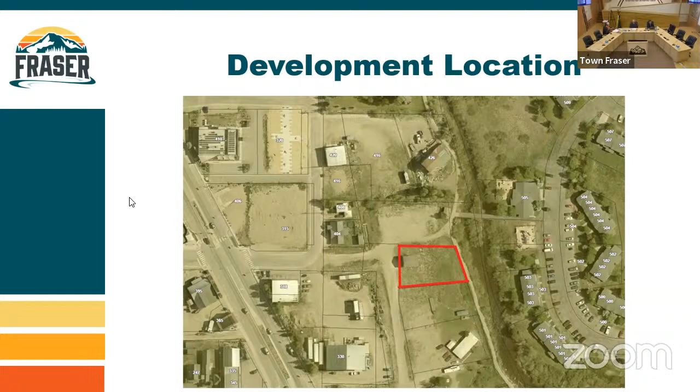Talking about the review timeline for this final plat application: on March 27th, the Planning Commission recommended approval of the preliminary plat and site plan. Then in April, the applicant submitted the final plat application and the referral review period occurred. And then that leads us to today's meeting, the public hearing for the final plat application.

And certainly there was a lot of conversation and activity before this. If you all remember, this parcel was involved in the ballot measure, the land swap. And when that vote failed in November, the town and the applicant have been in conversation about their development plans since that time. Their preliminary plat application was submitted back in January, approved in March. So again, this is just a snapshot of the final plat timeline.

Public notice was provided for today's public hearing. It was published in the Sky High News, Middle Park Times on April 24th. That's the legal notice as it appeared in the newspaper. The applicant also mailed out notices to nearby property owners two weeks ago as required by code, and those affidavits are provided in the meeting packet as attachments 13, 14, and 15 for reference.

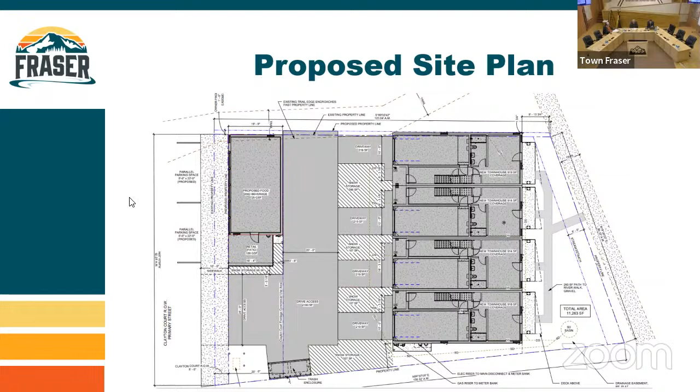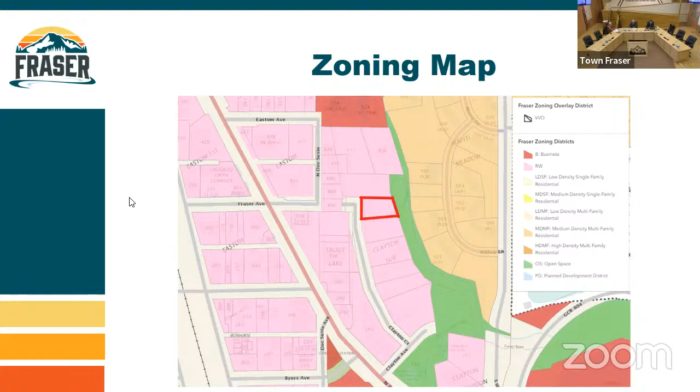These are some of the things that were emphasized and discussed through the preliminary plat application and public hearing back in March for that application.

So the intent of the Riverwalk district -- the intent of a zone district is essentially a vision or purpose statement, saying development in this zone district should do what exactly. The intent statement for the Riverwalk district can be summarized in these bullet points: development that creates a high density, walkable, mixed use neighborhood, integrates the historic downtown with the river, generates downtown redevelopment, economic revitalization, and so on.

Town staff really believes that the proposed development largely meets the intent of the Riverwalk district, namely with providing high density residential development and commercial uses on Clayton Court. Development integrates with the existing Fraser River Trail, and the future cafe space at the existing trail connection to Clayton Court will help activate the northern end of the entire Clayton Court corridor.

Let me ask a question about this plot, if I could. I'm trying to remember, we had quite a debate about the position of the commercial in this district, whether it faces the street or the river. I thought we kind of settled on that -- or does this language about positioning closely to the street come from the zoning definition, or is it an interpretation?

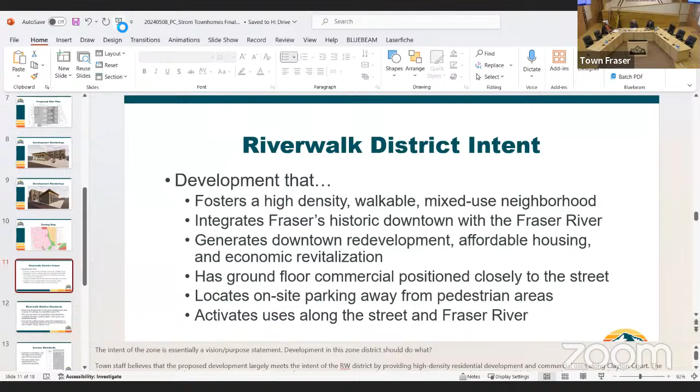And then later, in the building design section for mixed use, commercial and mixed use development, there's a statement: ground floor commercial uses shall be adjacent to street frontages as much as possible. And then there's actually an 'or' statement here -- it speaks to activating uses along the street or Fraser River, and promoting the walkable nature of the district. So I think the language around siting commercial uses is required along Clayton Court, but as far as locating them on the river, it's less strong language, if that makes sense. Although it's called the Riverwalk District, but anyway, indeed.

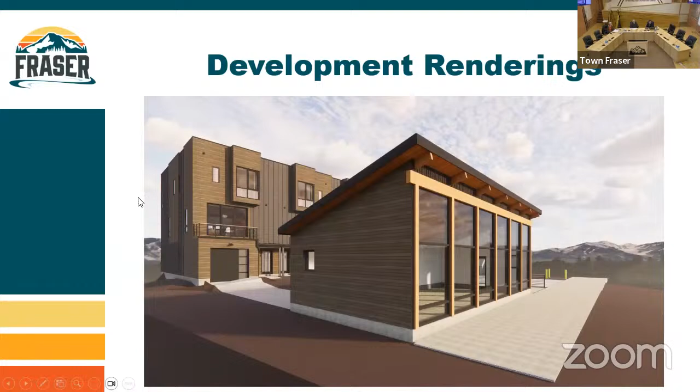Let's get back to where we were. Thank you. Any other questions from the other commissioners on this intent statement?

Moving right along to some of the zone standards, regarding the site's use: it's a mixed use development proposal, a mix of uses in the same development area or group of buildings. That's permitted in Riverwalk, where the intent is to have mixed use development in this area. The development proposal meets all applicable zoning standards -- setbacks, building height, open space, residential density, et cetera -- detailed in the staff report. Staff also believes that the commercial building provided largely meets the requirement to provide commercial uses for the first 20 feet in depth along Clayton Court, again as required by the code.

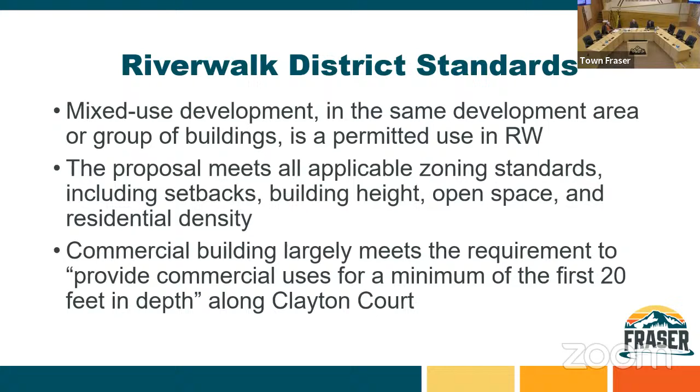Diving into some specific aspects of the property with regards to zoning standards, the site's access is proposed via a 26-foot wide paved driveway. This meets both town requirements and East Grand Fire Protection District requirements.

Parking standards: the development is providing 2 spaces per townhome unit, 1 garage space and 1 driveway parking space, which meets code requirements. Additionally, the town is working through infrastructure design and construction for improvements on Clayton Court.

This includes extending a water main through Clayton Court, paving the road, adding sidewalks, and parallel parking on both sides. It's anticipated that 2 parking spaces will be provided along the development's frontage, and town staff is allowing those spaces to count towards the required parking for the commercial structure. Moving forward, as other properties on Clayton Court develop or redevelop, the town will allow any parallel parking spaces in front of those properties to count towards required parking minimums, as allowed per code.

Landscaping and trash enclosure: the applicant did provide a conceptual landscaping plan; however, the town is requesting, at a minimum, quantities and types of proposed plantings. Because this is a mixed use development in the Riverwalk zone, landscaping is not required per code, but it's strongly encouraged, and since the applicant is proposing landscaping, the town is simply requesting some additional information.

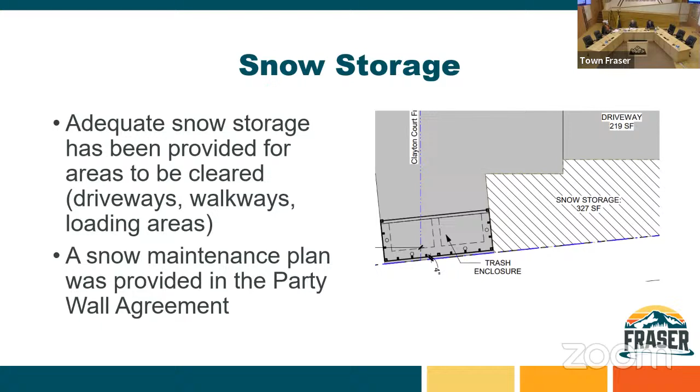Exterior lighting was not provided in the preliminary plat application and was a condition of approval, but with the final plat application the applicant has provided an exterior lighting and photometric plan. It appears to comply with town code requirements regarding lighting intensity and illuminance measures. The only request from the town is that a note be added explicitly stating that all light fixtures and bulbs be dark sky compliant.

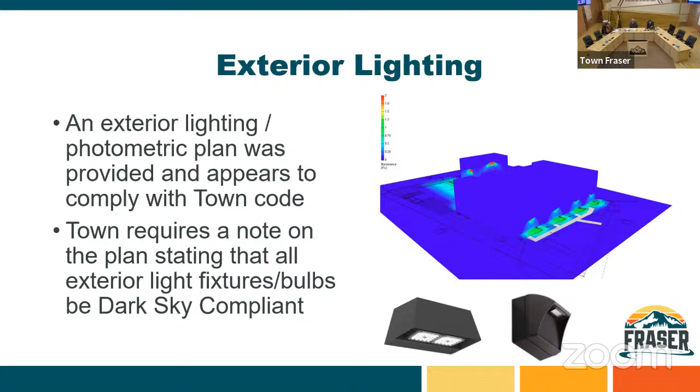On that lighting plan, the applicant has provided images of the proposed fixtures, which appear to be fully hooded, which would be dark sky compliant. We're just requesting that note be added. This lighting plan is attachment 5 in the packet.

Ultimately, town staff recommends approval with conditions. Those conditions are outlined in the resolution as well as in the staff report. Essentially, the town will require that all pending referral comments be addressed from both town staff and external referral agencies.

The applicant did address a majority of the comments from the preliminary plat and site plan submittal, but there are still some pending comments to be addressed. Those comments are summarized as attachment 16 in the packet.

Another condition of approval is for the applicant to execute a development improvements agreement for the private drainage and private landscaping. Frankly, this was something that was kind of missed by town staff at the preliminary plat submittal. In review of their development application, all of their utility infrastructure is private, and our DIA doesn't cover private infrastructure except for drainage, stormwater infrastructure, as well as private landscaping. And that makes sense, especially given the context of this site adjacent to the Fraser River. Essentially, this DIA would just ensure that drainage infrastructure is built according to the plans, but ultimately that infrastructure is privately owned and maintained.

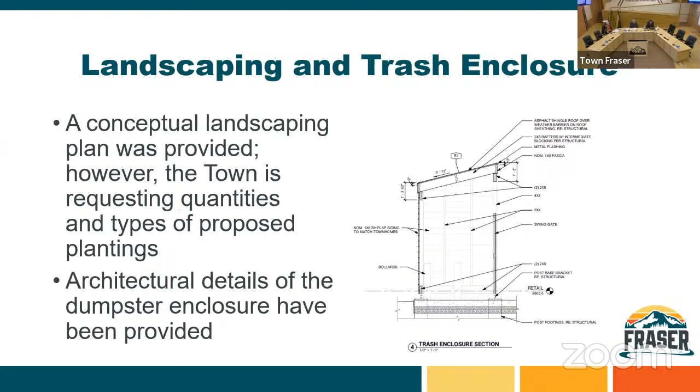Any other questions or comments? One thing, I noticed the fire department, I thought they'd asked for 26 feet on the drive in front of the buildings. I actually reached out to Ryan with East Grand Fire District to confirm this. Let me go back to that slide. So there's a 26-foot wide driveway entering into the site, and then when it goes to the north to access the townhomes, it narrows down to 20. There's a requirement that an access road for aerial fire apparatus, for buildings over 30 feet, has to be 26 feet wide. I think if this was one continuous structure, Clayton Court would be that access road. But in this case, because you have a building in front and then the townhomes in the rear, that 20-foot wide driveway in between the two is the access drive.

What Ryan from East Grand Fire told me is essentially, so long as they can show that a fire truck can navigate those turns, they would allow the narrower driveway width. So that's a comment from East Grand Fire, and a condition of approval as it's a referral comment that needs to be addressed. But East Grand Fire is fine with that narrower 20-foot driveway. I imagine that ladder truck would just pull straight in and sit there, it probably wouldn't even navigate that corner, such a small lot.

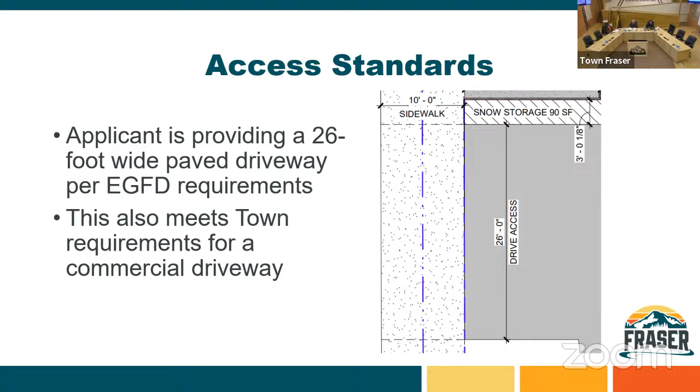Any other comments from the planning commission on this, at least the staff report? I just have one question. Does the anticipated parallel parking by the property fulfill the 3 off-street parking that Whitmer mentioned for the land use condition? I'll speak to that comment from Whitmer, I do think it needs to be edited. Our code states that for commercial buildings, for every 400 square feet of floor area, 1 parking space is required. In that comment from Whitmer, they included the area of the patio, however floor area is actually defined in our code as space just inside walls, so that patio space shouldn't be counted toward required parking. So the commercial building is 725 square feet, rounding up to 800, 2 parking spaces are required.

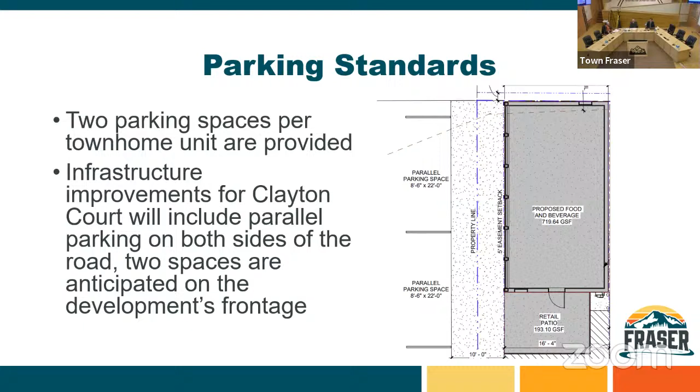Any other questions from the commission before we hear from the applicant? Okay. Just remind us of your name and residence.

Of course. Kevin Rifkin, 88 Alderbrook, Fraser, with Bison Investments. First, I want to thank everyone for taking time out of a Wednesday night. I know everyone didn't have to do this, so we really appreciate it.

I just want to, Gary, are you able to pull up the site plan while I talk? Yeah, if possible, just give me a second. So this lot and this project we've been toying around with now for about a year and a half, really trying to figure out what can we do and what's the best use within those restrictions. And when we first started looking at this, there was a whole different town staff, a few different faces on the planning commission, and a different code.

One of the things we worked on and waited on was the redevelopment or rezoning into the Riverwalk district, which changed our plan significantly. It required commercial - originally there was none here. We think Clayton Court is ripe for commercial development, for a walkable area, a good mixed-use area that's going to attract a whole crowd. Once we started designing this with the new Riverwalk district, we wanted to make this the first piece in the next ten pieces that are going to happen.

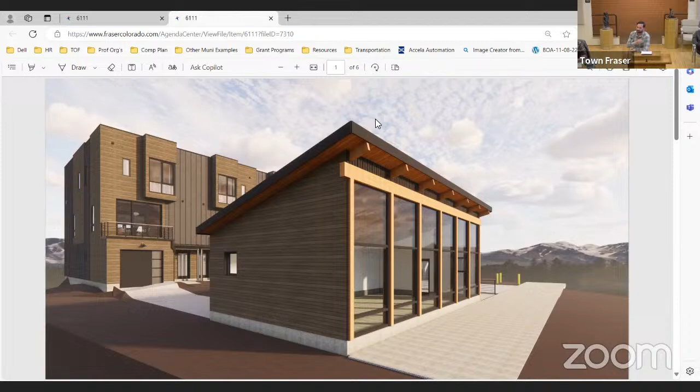The last thing I'll add is we tried to step the townhomes back, if you go to the site plan, to start to open things up. So we have land on the back that eventually, if the town ever wants to expand the trail, we're more than happy giving part of that land back, expanding the trail - because I know one of the goals was a riverfront park eventually, bleeding that into a riverfront park on our site, the next site, and the next site.

So it was a tough one to get to where we are. We had to make some tweaks to make sure we could get the sidewalk to 10 feet, so we gave a little bit to the town - I think 5 feet on that side. But overall, we're very excited where we are and think this is going to be a good catalyst to get Clayton Court moving. Makes good sense.

I think Peggy raised her hand. Yeah, go ahead. This might not be something you know, Kevin, but staff would know.

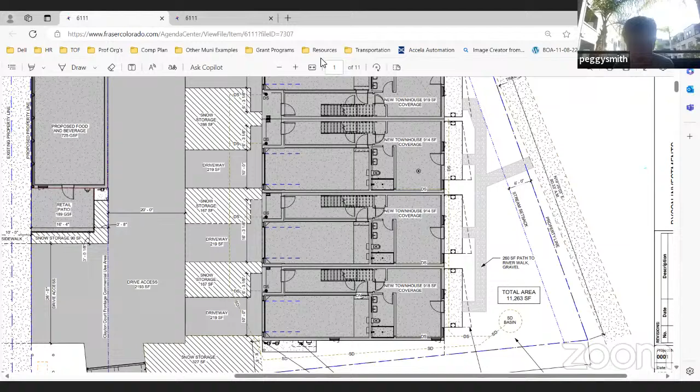Is there going to be 10-foot sidewalks on either side of that street, on Clayton Court? Yeah, that's the plan. So they're showing that on their site plan. The design is yet to be finalized, but the intention is to have 10-foot sidewalks on both sides of Clayton Court, as well as parallel parking on both sides.

So half of that sidewalk is on their property, half is on the town right of way then? It's actually not. Part of this - if I could zoom in here - this blue line on the left was the original property line, and this blue line on the right, through this plat, they are dedicating 5 feet of their property as right of way for Clayton Court. The town intends to do this with other properties along Clayton Court, so we have sufficient right of way to provide those 10-foot sidewalks. So the sidewalk ends up all on town property then? Absolutely, yeah.

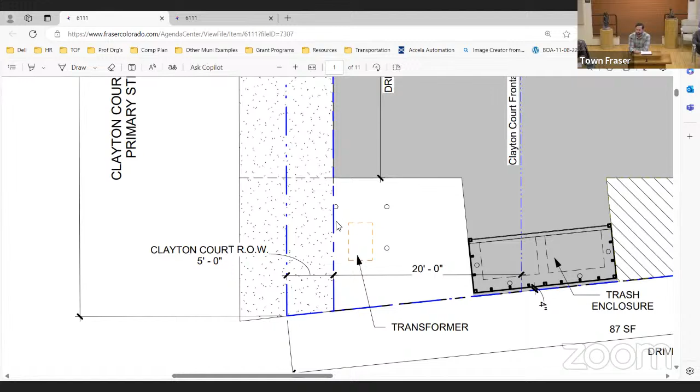It's interesting, I'm in California and they put sidewalks in residential areas on one side of the street, which works out really well in California, but I don't know how we manage snow, or how you access anything on the other side of the street.

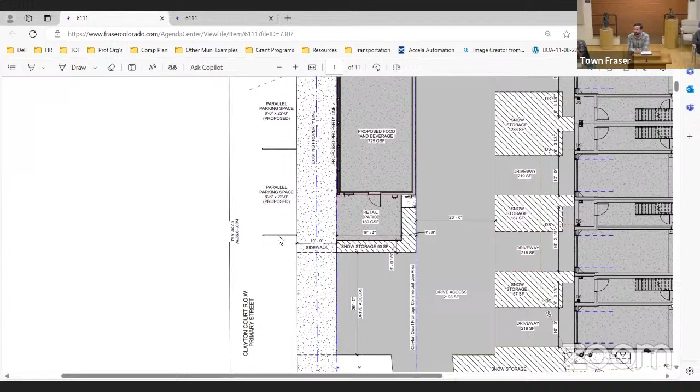So we explored moving the patio again and got some more opinion. With the way the art center's designed, we are working on putting in a cool little window on the art center side and a mural on that side instead of the patio, since the patio would disturb them. So we took your comment to heart last time, but couldn't figure out a way to make it work.

And I guess on that note, here's the elevations for that commercial building, and this is the window I think you just mentioned, Kevin. Yeah, so we're going to make that a little larger. And then we moved the door, you can kind of see it to that side.

So the goal is, we're trying to finalize a bakery in here, and you're walking out of the bakery close to where the Future Art Center is, the river trail, and then up Fraser Avenue. So we moved everything to be that focal point - you're looking straight down from the train station, and that's what you see: the river trail, the door, people hanging out outside there, with the goal of some kind of activation, albeit small, but mighty.

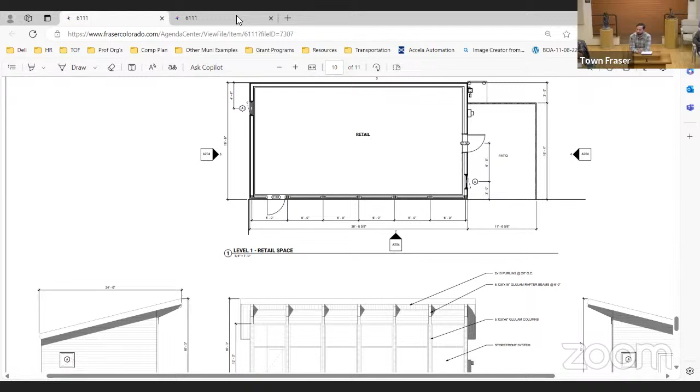I also want to note that there is a door right onto Clayton Court as proposed now. That's not shown in these slick renderings, but yeah, so.

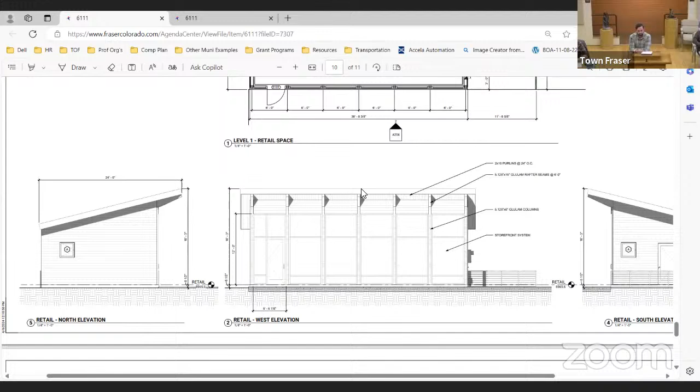That's all I have on my end. So a couple questions, Kevin. On the upper level where the bedrooms are, you've got an office in the center, 2 units instead of a bedroom. Is that an egress issue? So it will not be sleeping space, there's no egress in there, it's purely an office, so there's no way to control that in the future. I'm trying to remember, does code require an egress for a bedroom? Yes.

So our max occupancy will be dictated by that. Obviously we can't control what happens in the future, but one of the things - separate tangent - these will be sprinklered buildings per code. So we're going to take the precautions as much as we can, that we can control, but what we can't control, we're unfortunately at the whim of the buyers.

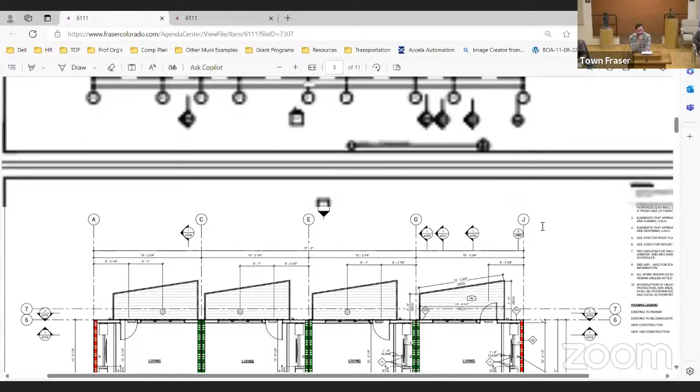Okay, and then there's a long report about floodplain, and this is a question for staff and for what research you've done. And then the one comment from Kit too about the high water mark and a 35-foot setback from the river. I don't know how the high water mark got determined, and what do we think on floodplain?

That's something that everybody asks me, and I know that this whole site bumps up from the river - it's pretty good elevation above the river, but thanks to all the years of fill that have been going in down there. So, just some thoughts on the river setback and floodplain.

Yeah, I can give a quick answer there. So right now we're using, for an old plat, what they called a 5-foot stream setback. And what we found is that's 5 feet from the 30 feet, give or take, that we have to be back. We've been trying to measure the high water mark and it's not gone well - sometimes we're 42 feet from the high water mark.

We did a quick measurement and survey last week and we were 41 feet from the high water mark. So we're going to monitor it and see if it goes up any more. My guess is we're probably right there now. That's going to go on the final survey.

And then the floodplain, as you mentioned, we're significantly above it per the FEMA floodplain map, and we had to check that with title and our insurance. That's one of our conditions, to overlay the floodplain, so we'll have that done on the FEMA map. So will you bump the floor level up a little bit though? There's talk about what elevation that ground floor will end up at.

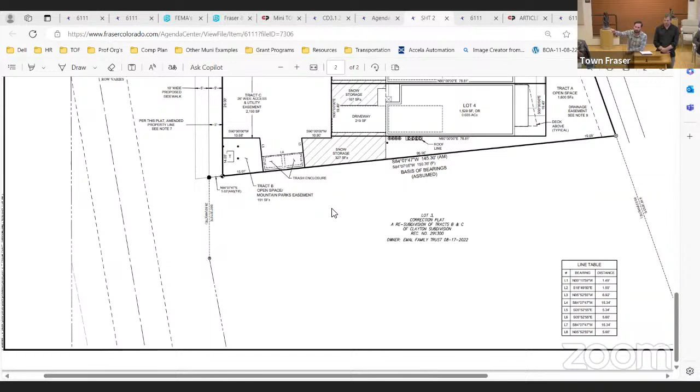And where would the dumpsters go when that common access gets opened up? When you look at the next site, once that opens up, it gets a lot wider. The world's kind of our oyster since we don't control that site right now, but whoever does, we'd work with them to swing it this way or that way, putting it on the side of the new 26-foot road to create some space. We'll need to create a new dumpster enclosure on the new site that's shared, with an agreement in exchange for that curb cut.

Any other questions for the applicant from the board? Oh, Peggy, yep.

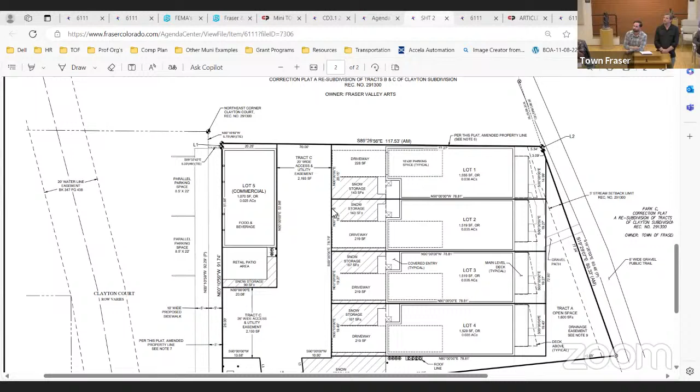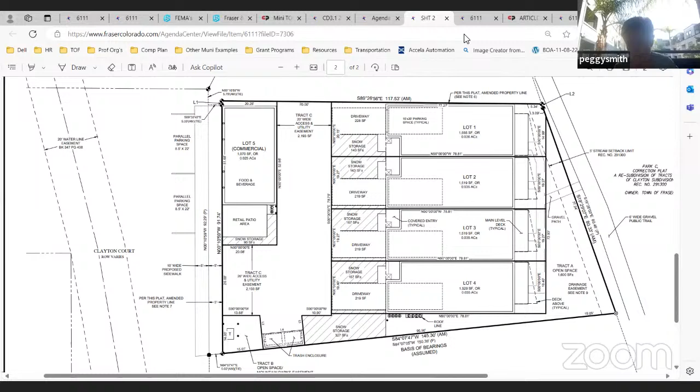I looked at this party wall agreement, which really didn't address a lot of the issues I foresee, like how you're going to maintain the roof, how you're going to restain the building. The south building's going to get more sun, so the north side's going to wear differently. One guy doesn't want to restain, he wants purple, somebody wants blue. It seems like you'd better have an attorney really look at this - who's going to pay, the insurance, what happens if the middle guy lets his insurance lapse and he has a bunch of crazy VRBO renters who overflow and damage your unit next door?

All the things that can happen when you don't really have an HOA in charge of it. Yeah, we couldn't agree more. One of the things we wanted to do is we're actually talking to a few HOA companies, but we couldn't really sign up prior to getting this going. So likely before anything's marketed or for sale, we'll amend this and record a new party wall agreement with the HOA that encompasses the VRBO issue, sun damage, all that stuff. But these are the base rules we want recorded to get us to where we need to be before engaging a property management company.

So you're going down the path of a party wall agreement instead of a formal HOA where you're paying dues and escrowing for roof replacement down the road? That's the idea right now, though there's a slight chance that changes. Since it's four townhomes, a lot of times what we've seen with our other developments is a party wall agreement works well, though obviously there are cases where neighbors don't get along. A party wall agreement can save a lot of money and be beneficial, but if we need to amend and put an HOA agreement in because we feel this isn't covering it, we're more than open to do that.

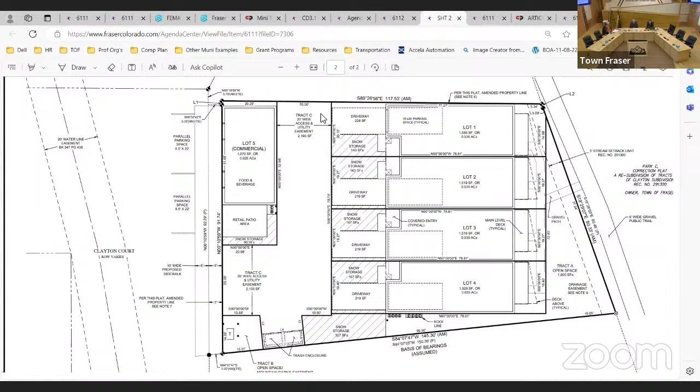Any other questions? Thanks, you guys. Thank you, and thanks again for coming out on your Wednesday night. You bet. So any input from the audience?

From the public? Okay, anything more from the board?

Andy, yeah, this is Bob. Just go ahead, Bob. I want to commend the development team. I think they had a tough site, it's not a big site, it's a tough site, there were a lot of things they were juggling. I appreciate they addressed my comment from the last meeting, and I think overall it's a really good plan and it will jumpstart our development in the Riverwalk district.

My comment I think was addressed really well. I do hope we can have some really nice public and commercial spaces that face the river here, but I understand on this particular site it'd be pretty much impossible. I hope we can encourage that as much as possible as we go down the way, because we just don't have a quiet place to have a cocktail in this whole valley. This would be the place for that sort of thing. It'll be wonderful, so even if you don't drink cocktails, I'll join you there.

So I'd entertain a motion. I think we have that in the packet, right? We need to close the public hearing first. I'd entertain a motion to close the public hearing.